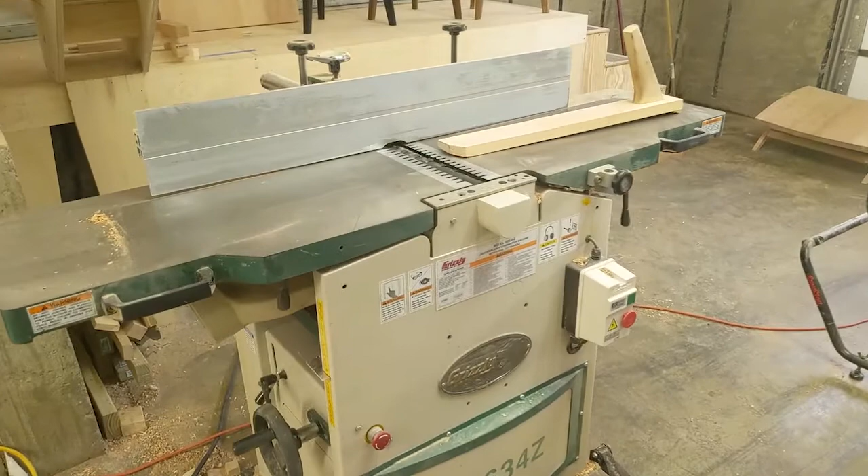Grizzly is good tools. It's a good planer jointer. It saves space because you can flip it up, and then you can sit there and do the other side of the wood.

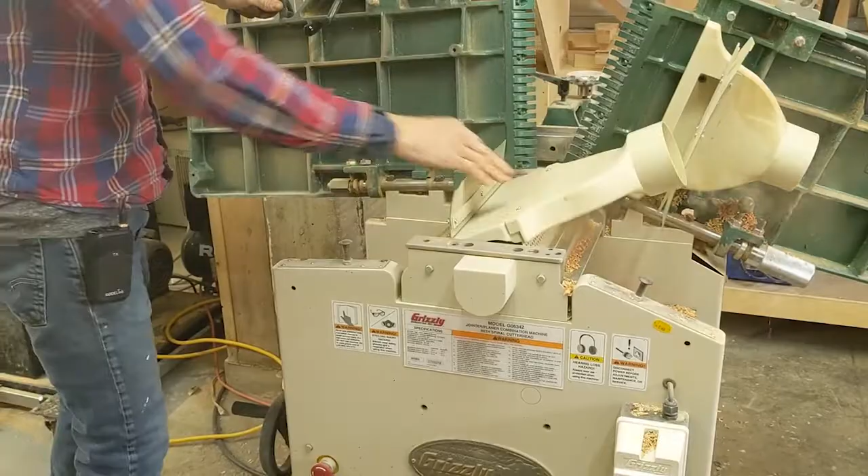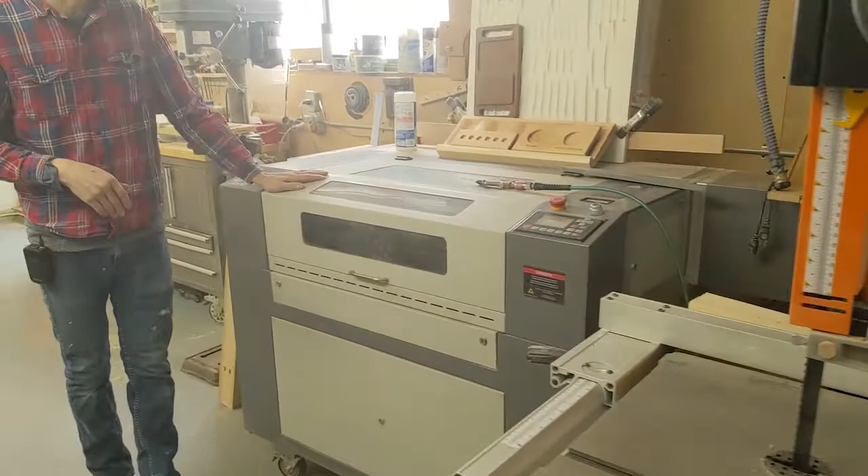Come over here, this is more of the CNC or technically advanced side. Here we have a bandsaw for ripping up large timbers. We have a laser cutting machine, which is 16 by 30.

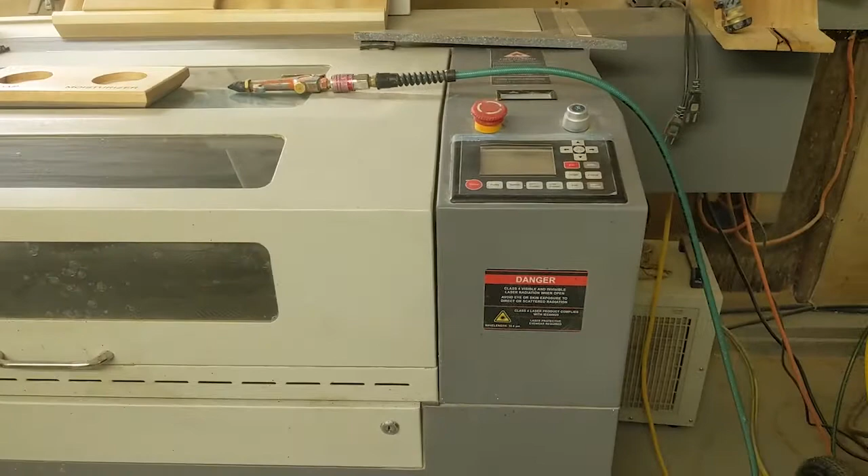It allows you to do engraving. I don't have that many things, but basically it's a slicer and dicer of any kind of shape that you want, up to 1/4 inch material. It cuts plexiglass, wood, and you can engrave on stainless steel. It's really a useful tool.

I also use it for a lot of jigs. So if I don't want to use a CNC machine, I'll cut some 1/4 inch material and use that with a regular traditional router. It's a quicker way.

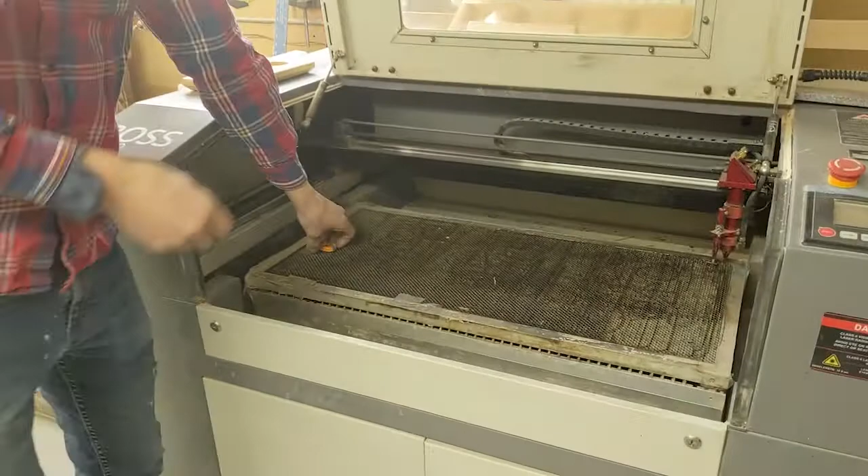Not to get too into it, but there's no blade that cuts the material, it's a laser that cuts through it. So it's a lot easier, you don't have to hold down the material while it's cutting. You just put the material in, and the laser comes over and cuts it. There's no mechanical engagement in the material.

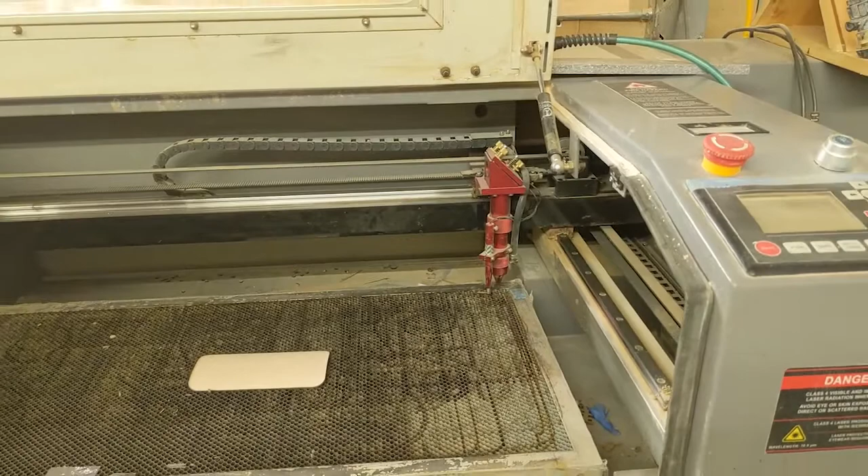So it's a little faster, instead of trying to figure out - with all woodworking or any process, holding down your material is really the big pain in the butt. So this is a nice quick fix.

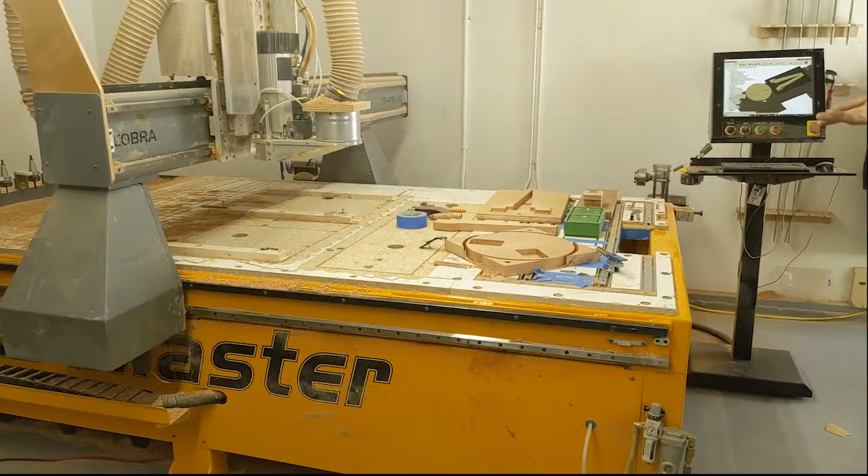It's right down to the workhorse. This is the larger bed, 50 inches by 98, so 4 feet by 8 feet. It's oversized too, so it has an inch on either side, so you can take a full sheet of MDF, put it on, and then start cutting it.

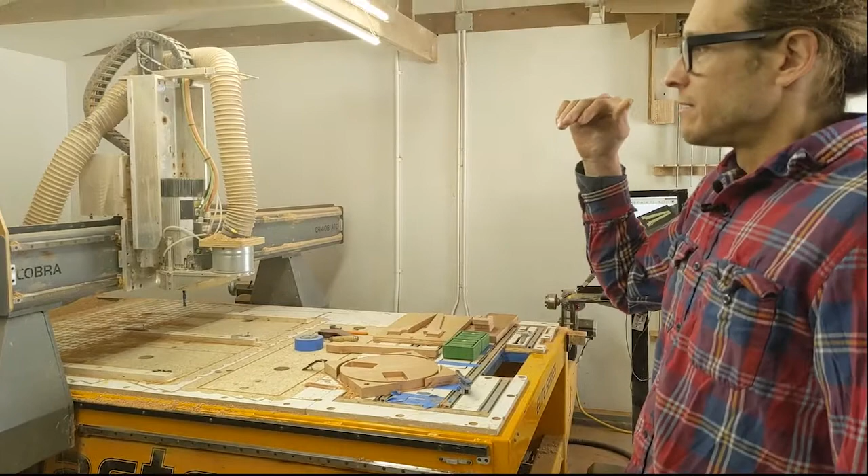These machines are made for two different types. You can sit there and do sheet flat cuts, which is where the profit is with these machines. So if you're thinking about purchasing one, tons of flat work is really great - you just put the material on, get your file ready, and go. With the furniture stuff, you have to do a lot more jig making on the machine.

It's a 3-axis machine, so the spindle goes this way, and up and down. It's a spindle versus a router, there's a little bit of a difference. A router basically has no feedback. A spindle, as it cuts through the material, understands the resistance and tries to keep that RPM up.

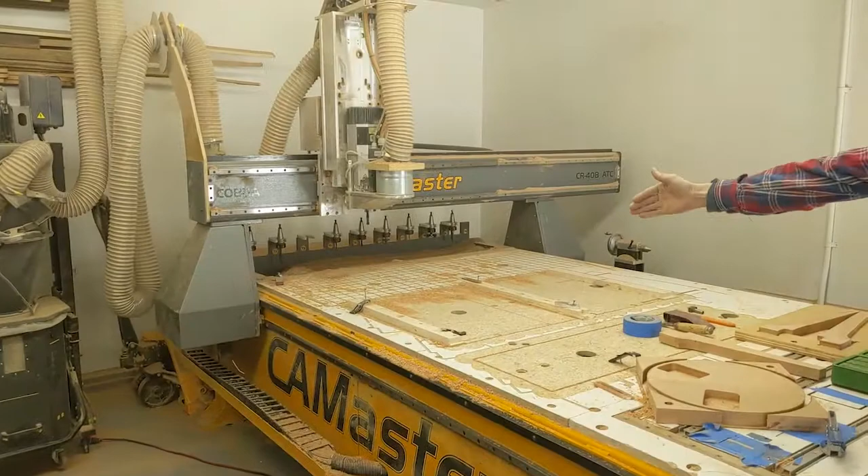These are jigs here, just different jigs. I really think of this table as a work table, not a machine, it's like all in one. So instead of moving the material through a machine, it allows you to place the material on the machine and then move the machine around your material.

So there's a lot you can do with design if you have a solid piece of wood sitting there and you have the blade dance around it, versus trying to figure out how to manhandle this object around on it. So today, just to ramp up, I'm going to get the stools and show you what I have.

The first piece of furniture I made was a chair, and then I moved up here and went to Sawkill, and he has lots of stools. So I thought, let me see how hard it is to make a stool. From a chair to a stool - I always felt stools were kind of the more simple end of the evolution of furniture, so it'd be a fun project. We call it the ultimate stool, just to get things going.

I was really into modular design, so I wanted the legs to come off. The first stool basically had hardware, and that's where the seam kind of evolved. That said, it worked, but it wasn't super strong, so I ended up gluing it and keeping the hardware just to show the evolution. This is the shop stool, the first one done.

You can see it's been beat up a lot, but it works great. It's nice, it gets kicked around. It's cherry, so it gets darker. It's a nice simple piece. Then we tried to make it a little fancier, and we went with the walnut.

A lot of the first wave of furniture we made - my sculpture work had metal plates, and I really like machining, so I wanted to incorporate metal with wood. But I think generally speaking, a lot of people just enjoy a solid wood piece of furniture, or if there is metal, it's for drawer handles or the little bottom of the feet.

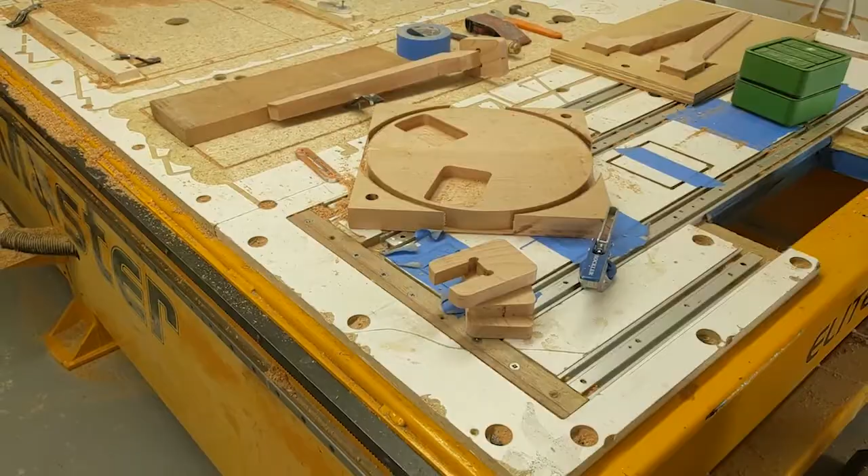Now we're going to cut this piece right here. This is a toolpath - if you look here, this tells you that you have to dial in all the speeds and feeds for your material. If you're cutting wood, it's one speed; if you're cutting foam, it's another speed. And you have to tell it where to cut and how deep to go.

The next pass is a finishing pass that comes down and does a nice clean pass. So now it's going from a 3/8 bit to a 1/2 inch bit, which is just a bigger bit, so sometimes it gives a better finish on the edge. It's just going to cut a 1/16 of an inch off all the way down.

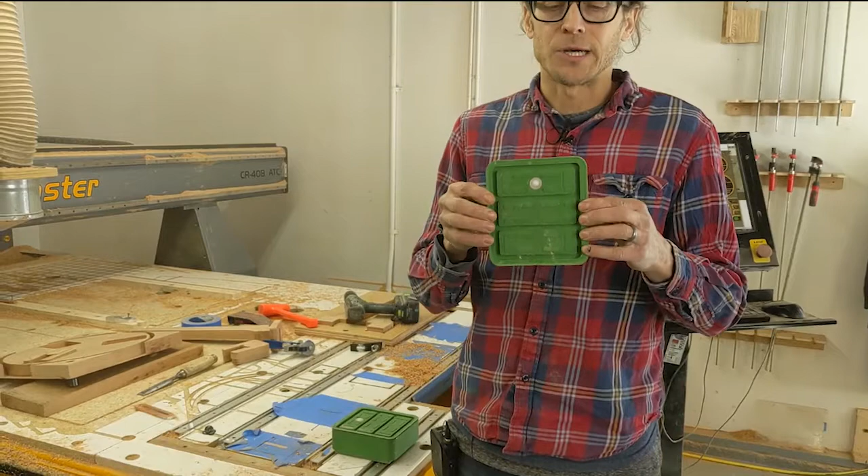These are industrial hold down pucks. This was 150 bucks, it's just solid. It's a rubber material that never changes size in the heat, and if you're dealing with a tool that can shave off a thou, which is a very little bit, you really want to make sure that this doesn't move at all.

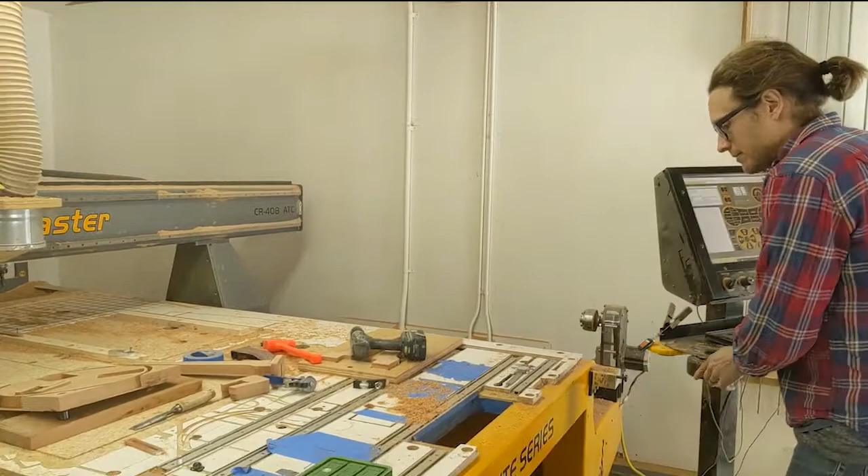And then you have the vacuum hold down system, which is this guy. There's several different ways, and this is just a huge discussion, but these are two vacuum fans that suck air through a system, and this knob gets pressed down when you put the material on, and it sucks the material to your pod. The cool thing about it is that I can put two, I can put four, I could put eight, so it really depends.

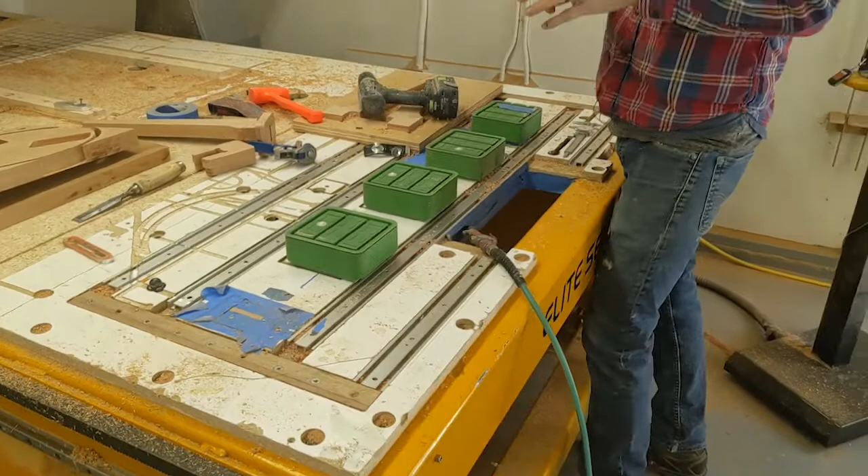If I'm working on a big bed post or something, or a larger piece of material, I could lay on this machine a 96 by 12 inch wide, 2-inch plank, and I could machine the full thing. So you can do really big architectural pieces with the machine, or you can do smaller leg pieces.

So this part of the table for me is my business end. The rest is for larger format stuff. This is literally my bench made area right here.

So again, this is all in the software at the same time. It's basically mirroring what I've done in the CAD software. It'll get a little loud, but I'm just going to show you what it can do.

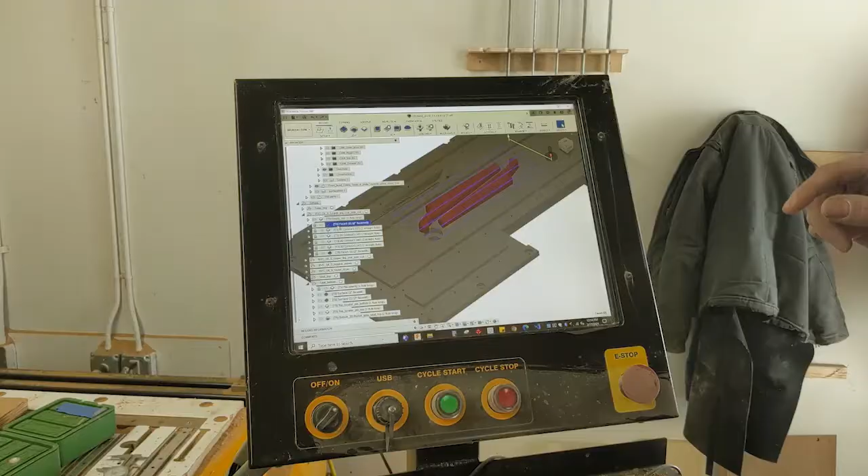First thing I want to do is make sure that the thickness of the material is the same. So it's going to get fly cut, which preps the top.

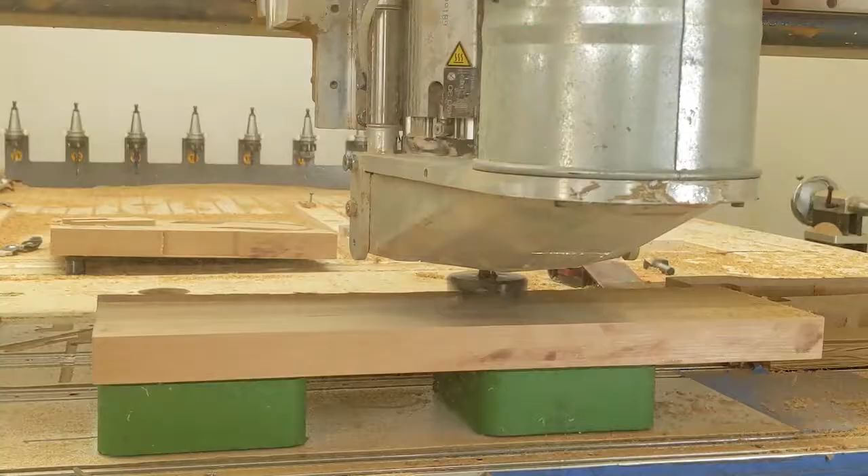The question being is, why not just plane the piece of stock first and then cut out the profile? The reason is because this has to fit into here, and this machine does a better job making sure the thickness is exact versus a planer and jointer, which could have human error. If I touch the material more, there's more chance for mistakes versus touching it less. So I dress one side and put it onto the table, and I'll consistently always get the same thickness put into that.

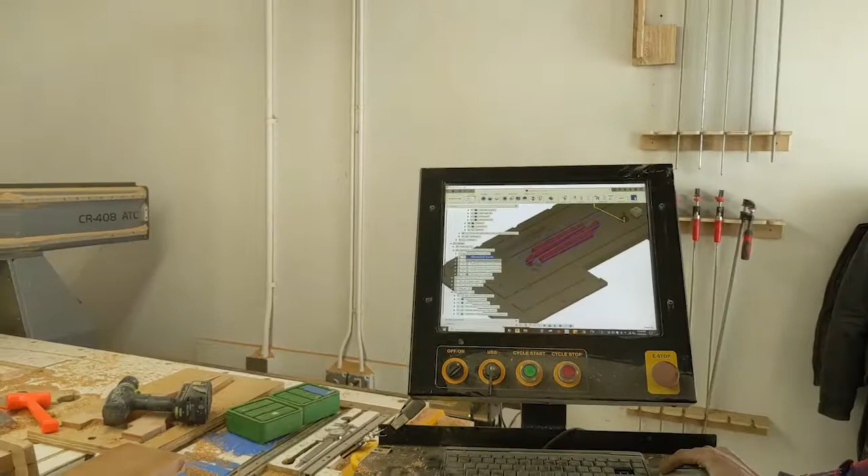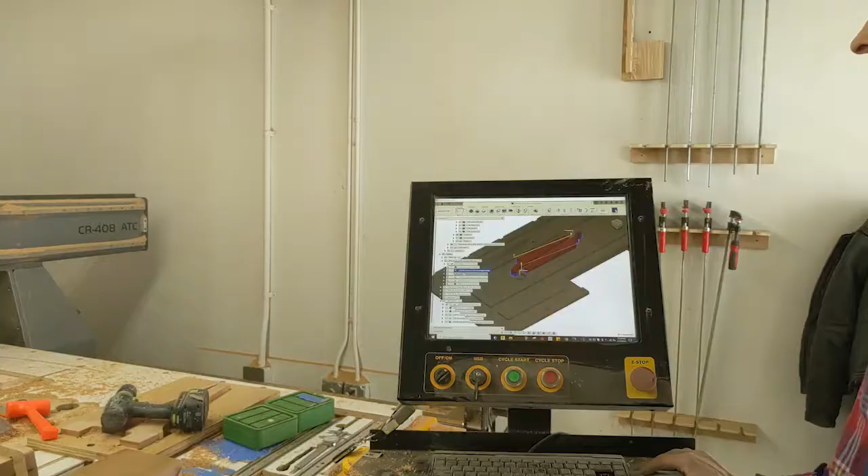So the way it works. After it preps the top, it cuts the ends, finishes that cut, and then it does the long sides.

So we can bring it over here. And that's how you make the ultimate stool.